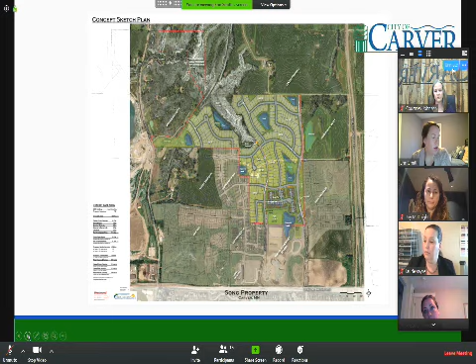So what an EAW is, is the environmental assessment worksheet. It takes a look at a project on all levels, looking at both the natural and built environment after a project is completed. So it looks at things like water resources, air quality, and traffic—things that are built after the project.

At a previous meeting, we discussed the EAW and the council deemed it to be complete. At that point, we were able to route the EAW to a group of experts—I'll go through the list shortly on another slide. But since it was complete, we were able to start the comment period, and we'll go through the comments received from the agencies and what the next steps are.

Something to note: there's no land use review tonight. The EAW was the first step in this process. So right now we're not contemplating annexation, preliminary plat, rezoning, or final plat. We are just discussing the EAW, the findings of fact, conclusion, and record of decision.

Again, just really quick, there was a kind of quick and dirty version of what an EAW was included in the packet, but it's a process run through the Environmental Quality Board. There are many acronyms throughout this entire process. The EQB is an office of the state, and they run the EAW process to make sure we're checking all the boxes, making sure the correct agencies see the information, and they go through the EAW to make sure it's complete. So tonight, the question is whether an environmental impact statement is required.

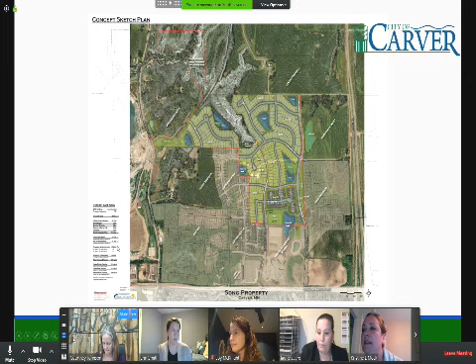Does anyone have a motion? Courtney, I can make a motion to adopt resolution 111-2020, adopting the findings of fact, conclusion, and record of decision for the Timber Creek Environmental Assessment Worksheet. Thank you, we have a motion by Councilmember Mott. I will second that. And a second by Councilmember Henry. Mr. Mayor, can you do a roll call vote, please?

Councilmember Henry, aye—Glenn Henry. Councilmember Mott, aye—Christie Mott. Councilmember Sayer, aye—Lori Sayer. Councilmember McKnight, aye—Joy McKnight. Mayor Johnson, aye—Courtney Johnson. Thank you, motion carries.

Let's see, moving on. It is almost 7 o'clock, but let's go ahead with the Carver County CDA grant agreement, Ms. Smith.

Are you still on my screen share? Sorry. Yep, thank you. Thank you, Mayor and Council. Tonight we are reviewing a CDA grant agreement for the second Carver Crossing building that we've discussed a couple times as a group. So far we've seen a concept level plan for the second CDA building.

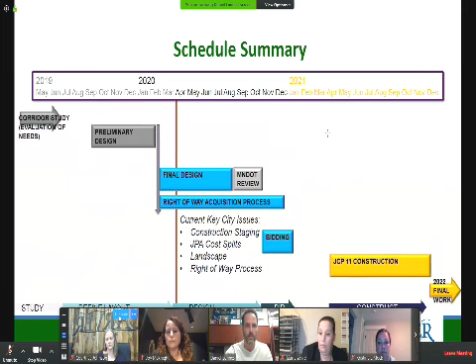And then, of course, the right-of-way process, which is a 9-month process in most cases, beginning with the county leading that. So bidding is expected to happen late fall, November, December. If it gets pushed back a little bit, it'd hopefully be January, February. Construction starting April, May. A single year is the goal at this point.

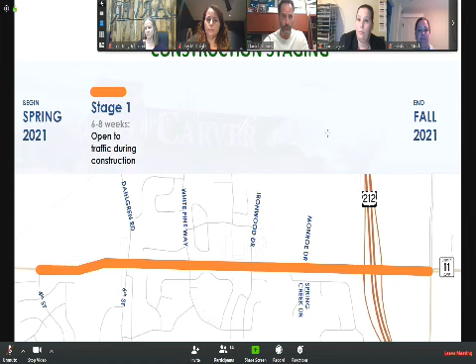So construction staging, you've probably seen most of this, so I'll keep this brief. Stage 1, spring of 2021, would be intended to really start up the project with construction under traffic, work on both sides of the road. The trigger on that would be before school is out. At that point, traffic would be maintained on County Road 11, probably the April, May-ish duration, with barricades and barrels set up on each side of the road, and some work happening in the boulevard.

Stage 2 is the big moment you've been hearing about. That's the closure of County Road 11. What's important to note is that's going to be contractually tied to school closing, or school being out. It's estimated to be about 8 to 10 weeks, but obviously weather can influence that. So after school is out, it would be closed through traffic until the work between Ironwood and Dahlgren is completed. They will have contract requirements that incentivize completion dates and such.

But the movements at this point, you'll notice traffic is still open at Monroe. To some of the early questions about construction access, Monroe would still be an active intersection. The hard closure is actually at Ironwood. So from Monroe to Ironwood, you'd see construction under traffic.

You'll see a lot of activity between Monroe and Ironwood, but it wouldn't technically be closed for this duration. There would be some short-term closures for putting in the pedestrian underpass between Monroe and Ironwood. However, that would have to be coordinated, and that is to be defined further in the staging plans.

During this stage, you have all movements going across County Road 11 and under Ironwood, and all movements going across Dahlgren. But the through traffic has been diverted.

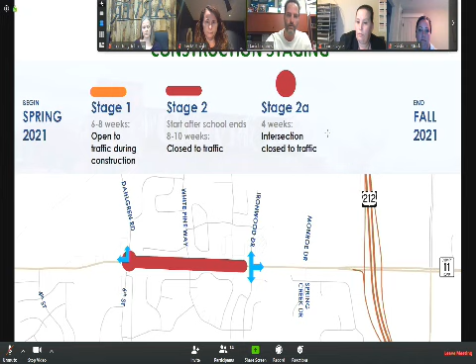So we're having the county take a look at the traffic modeling. What would that look like, sending a couple thousand vehicles downtown? How do the stop control intersections handle that? What's it going to look like? We're trying to get a better feel for what to expect for traffic operating through this portion of the city. You have a certain percentage detour.

We're also taking a look at truck rerouting from Mueller's Pit. Again, that's something that's to be coordinated in staging plans. Some discussions with haulers is going to be ongoing to try and navigate this.

Where you can see things trending is there's a lot of details to be worked out, but that is happening. The staging plans are being developed with this general concept in mind, with a lot of things to be ironed out. Access is being maintained for residents, businesses, Carver Elementary, and the Fire Station at all times. That's a construction contract requirement, stated in different ways, but it's going to be a construction requirement.

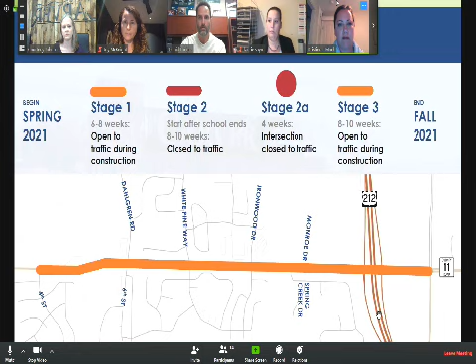Okay, Brent, I could perhaps defer to you a little bit on that. This at this point is some early concepts. The staging plan is yet to be defined and finalized, so comments like that will be taken forward. But Brent, could you chime in a little bit on that early thinking on that?

So two pieces there. We haven't determined specifically where on those side streets or local streets we put them. We've had to advocate for all the streets there are listed as city streets, and so the county is controlling 40. So in a lot of ways we would have to agree with the county, or they'd have to take on that same position since it's their quote unquote road. So they'd have to agree with that strategy to slow traffic down.

We'd advocate for that, but we can if that's something the council wants us to do. But we know for sure that we have the ability to dictate how traffic is managed on local city streets. So that'd be a great comment for staff to have. We wanted to see speed bumps on Main/County Road 40, and then if the council agrees, at some point we can bring a plan back to the council on where we propose to place the speed bumps, and then you can sign off on that location or give us some suggestions on alternate locations.

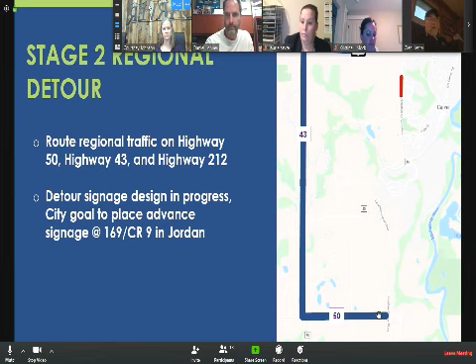Okay, and then as far as speed bumps on 6th Street, if those were accidentally left permanently, I would not object to that. Anyway, that was my only concern, about funneling as much of the truck traffic around Carver rather than putting it right through downtown. All right.

Hey Dan, I just had one thing I wanted to clarify. Can you go back to the slide with all the different phases of the staging? I have a question about phase or stage 2A. I assume that because of the naming convention, that will take place during the 8 to 10 weeks where that section is completely closed down.

Is that correct? Yeah, basically what they're saying is there would be a 4-week window where they'd close that intersection down, which would happen concurrently with the rest of the closure. Okay, thank you, that was my question.

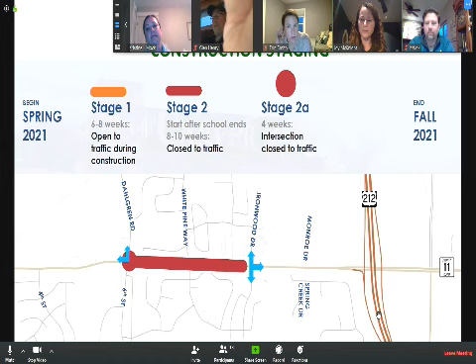Yeah, Joy, go ahead, Joy. Sorry. No problem. So I just want to second Christy Mock's request for the stop sign at Broadway and Main.

Love that idea. I know we're looking at multiple different detours. I think it'll be important to get the signage and communication right. We want to make sure if people are trying to get to 212, they take the detour on 43, and that the local detour is not to get onto 212 at all — it's local access only. I think that's the intention, but we should emphasize that through signage, because technically that's for people to get to the residences, the downtown, the businesses, maybe downtown Chaska. It's not to get on the freeway.

Yeah, there's a number of different techniques that will have to be considered in the staging plan. Ultimately the reality is people are going to take the path they feel is most convenient. Sometimes when you put up signage that says expect extreme delays, people will make a very quick turn. So we'll have to balance that with what we're trying to do operationally to keep the downtown somewhat free flowing and make sure we get the traffic split. Good point, thanks.

Tricky, Dan, honestly, I am fine with whatever we have to say on those signs to keep people.

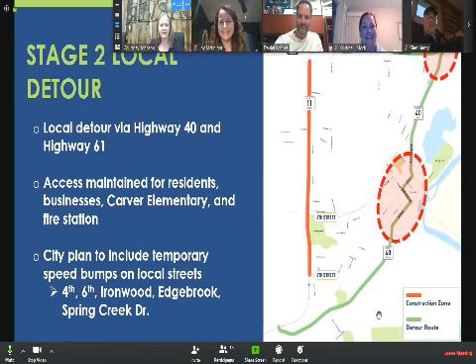All right, ready to move on? Let's do it, wherever you are. Yep, let's go ahead Dan. Okay, so I will turn this over to Aaron to talk about the steering committee for landscape.

Great, thank you Mayor and Council. If you'll remember at our 2019 strategic plan meeting, a directive from the City Council was to develop a steering committee to work on landscaping, wayfinding, and branding for the corridor. So that was part of this project. We had a really fantastic group of people, and there's some nice photos of them to come.

The main goal of this group was to gather input from both residents and business owners. We were pretty specific about the group of people we pulled together, so it was important that we got diverse stakeholders for the project — not 10 people from the same neighborhood, 10 people that shared the same opinion, or 10 people that use the corridor the same way. So we solicited for a resident that lived in town for more than 10 years, a member of the HPC, a member of the Planning Commission, the Parks Commission, a master gardener — we lucked out and actually had 2 — a resident that lived on the corridor, a business owner on the corridor, and a parent with a child at Carver Elementary.

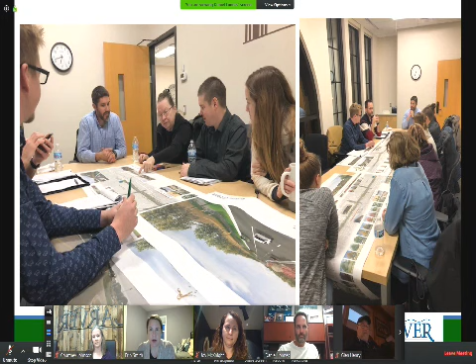So here is the group working. Again, we met a few times and talked through several different options. They gave us a lot of really good feedback. It was fun to see the group work too — largely they didn't know each other, so it was fun to watch them build relationships around the project. It started out as something kind of conceptual to them, but then they were able to make some really concrete decisions on the direction they wanted to see.

Some visions they had from their first meeting: they wanted to develop a corridor that was unique to Carver, so it didn't feel like you were driving down any road in Carver County. They wanted the idea that it was branded and had a unique identity, so you'd know you were in Carver when driving the corridor.

They also found value in incorporating areas we've already spent a lot of time working on collectively, like the sign coming off Highway 212 near Levi Griffin. The signage was important to them, as well as elements already incorporated into the design of Levi Griffin and Monroe Drive. In the design of those two streets, we often pull the Minnesota River up into Carver, with river rock that mimics the way the river travels through the medians on Levi Griffin and Monroe Drive.

Something else that was really important and helpful for them was to balance function, safety, and aesthetics. It couldn't be a project that looked great but wasn't safe for kids getting across to Carver Elementary, and it couldn't be so crowded that it was dangerous to drive down.

A couple of things to keep in mind when making decisions about landscaping: in many cases this is a one-time decision. It's not very often that a city goes back and adds additional landscaping or features to a project.

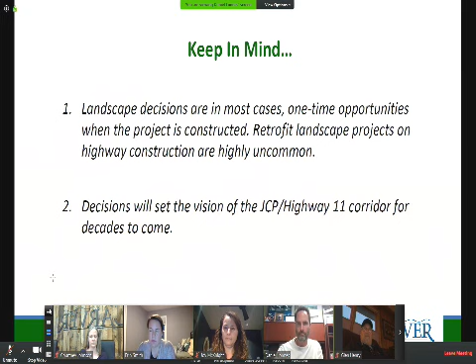Moving through some of the ideas the steering committee had, thinking about what it looks like long term, there was definitely a preference for more natural features. They often spoke about spacing trees in a way that didn't seem like every 6, 10, or 12 feet. They wanted it to seem like the trees existed before the road did, taking out those features where you can see a tree every X amount of feet.

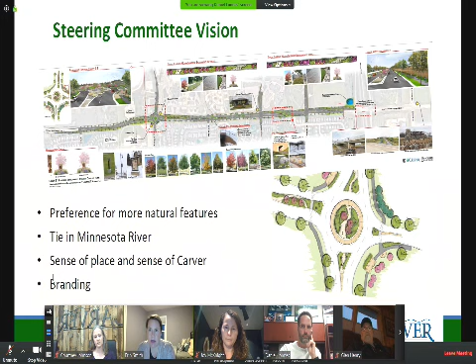They were passionate about tying in the Minnesota River again, mirroring what's on Levi Griffin and Monroe Drive throughout the project to create continuity throughout town. They thought it was important to have a sense of place, and branding was something they felt passionate about—whether the name Carver, the water tower, the tugboat, or the caboose. They wanted to bring those features into the project and pull things from downtown up onto the hill, creating continuity throughout town, pulling from both new areas and the historic downtown.

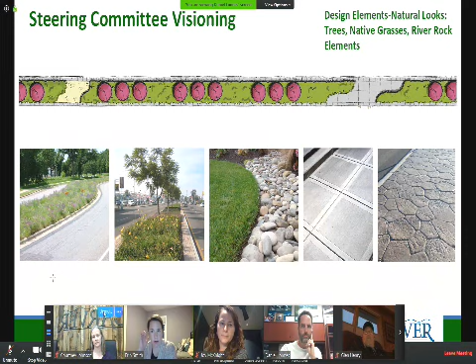Another big conversation was the median. We talked through adding river rock or some type of stone concrete to mirror the river, and then talked through a lot of the plants. At this point we haven't identified species, just a general group of plants we think would work. We're not here tonight to decide between specific trees, that will come later. But the group definitely felt passionate about having a robust tree canopy throughout the corridor, to create a look that in a few years feels mature and dense.

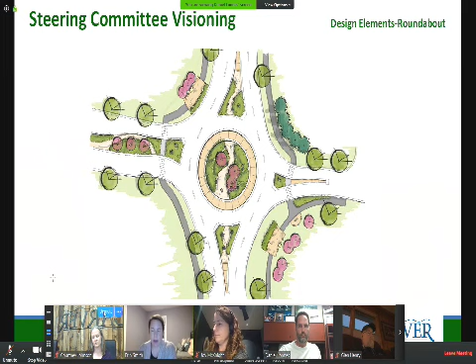Something else they were really excited about was trail lighting. Thinking about the underpasses and the routes to Carver Elementary that will be used, it was important to the group to have trail lighting. There are a couple of options: the decorative trail lighting poles we have throughout town, installed along Levi Griffin, Monroe, Carver Station, and Carver Ridge, along with some trail lit bollards, lower in scale but providing trail safety. Trail lighting was important to this group as opposed to corridor lighting. Dan can speak more to the type of lighting required if we light the corridor, but they felt trail safety lighting was more imperative than full corridor lighting.

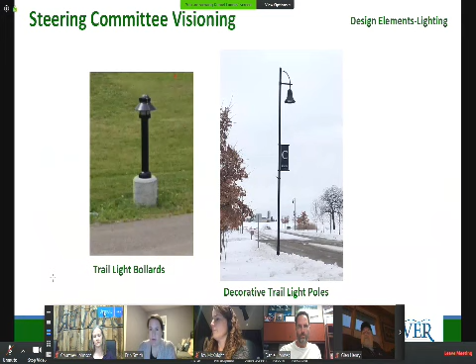One of the design elements they were really excited about were these columns, thinking through branding, the water tower, the tugboat, the caboose, things that scream Carver if you know our downtown. The more columns we'd want throughout the corridor, the more it drastically increases the price, so we need to be strategic about picking thoughtful locations where they'd be seen most directly. We likely don't have the opportunity to flood the entire corridor with these, but they could be important design elements at key points. We also talked through lighting them internally, so you could see them as you drive down the corridor, getting that branding and sense of place, knowing you're in Carver.

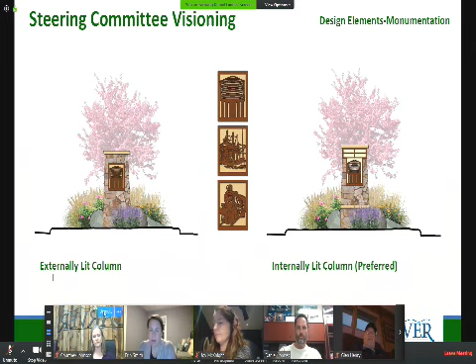Something else a lot of us are passionate about is the bridge over Highway 212, which currently just has a plain railing. As you travel down 212, most communities have some type of branding on their overpass, and we've thought about this a lot. We'd propose adding the Carver water tower and the name Carver to the current railing. As you travel west towards Cologne, we'd retrofit that railing with the water tower and the name Carver. In the future, should there be a trail on the east side of the bridge, we could add a railing with the additional graphic, but for now we'd move forward with the one as you travel west towards Cologne.

We talked a lot about the underpasses. There's obviously one existing now, with one planned in the future to get safely under the corridor. Jonathan Carver Parkway west of it is going to continue to develop, and a large number of our residents will live on that side but will likely want to travel by foot to things moving east, so to get downtown or through our trail system, it's important that we can move them across the corridor safely.

One way we can do that is through underpasses. So it was important to the group to retrofit the existing underpass with an upgraded fence. Right now it's the chain link you see in the photo, but they felt pretty strongly about going to a more decorative fence to add more of a design feature.

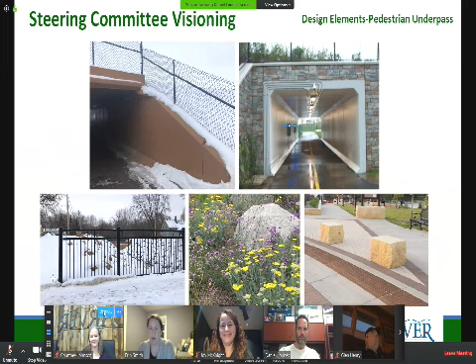I'd ask that you focus more on the underpass to the left, the more traditional round, plain underpass, instead of the one on the right. The right would probably eat up our entire budget with the decorative stone. So it's a pretty picture, but likely not something we'll be able to afford with this project.

Next. That's back to you.

What we decided to start with here is to give you a little perspective about what type of numbers would typically be associated with a project like this. If I just walk through the cost, it's a little hard to gather what's reasonable. This is well over a $10 million project, which we'll run through at the end of the effort, total project for all partners. So the numbers are fairly large.

So what we did is start looking at what's typical for a corridor of this size for landscape budgets and costs. We're going to start with a few examples of other corridors and the percentage of the project cost that was spent on landscape and visual elements.

It gets a little complicated because in cases like County Road 11, you'd have a median that could be concrete, and you delete that concrete and put in grass. The concrete costs X and the grass is cheaper, so there's a bit of give and take associated with decisions like that.

Conversely, lighting for the roundabout down to 6th Street isn't really an optional item. It has to go in, but there could be a slight variation if the lighting was typically a lower cost pole that was upgraded to a more decorative pole. So there's a lot of give and take on this stuff. We do the best we can to average it all out and say what's the net cost as a percentage of the corridor.

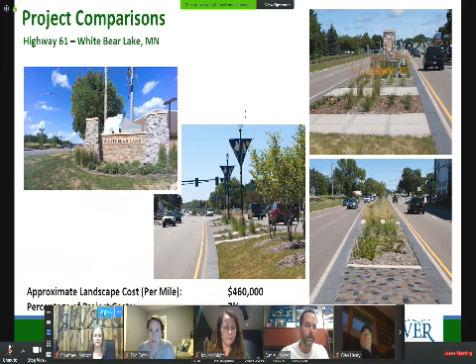How that broke out: the approximate landscape cost on that was about $460,000 per mile. The percentage of the project cost was 7% spent towards visual elements. This is less than a mile, so ultimately the landscape numbers were about $500,000.

You'll see a number of structures in this corridor. It's a shorter stretch of road with a lot of very refined medians, planter beds, decorative concrete. This is what we'd call moderate, upper-level landscape design. This will be one example of what was done in another community.

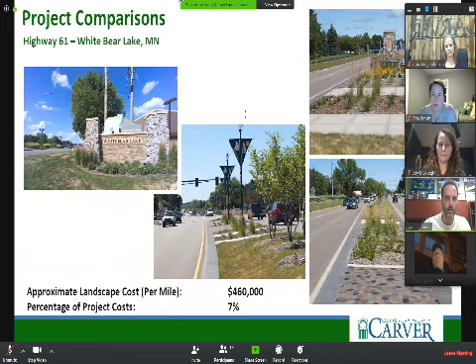Highway 5 in Waconia is another example. This is a little bit lower as a percentage of the project cost. It came out to be a little over $500,000, about $550,000. A lot of that was lighting. A big priority of that corridor ended up being trail lighting and off-system lighting.

The corridor itself was not lit, but the trail system was pretty well lit. Throughout it there's some benches, decorative railings and walls, and some spot planter beds out in the middle. That one came out to be about 5%, give or take, of the construction costs dedicated to some of the visual elements here.

Mississippi Drive in Muscatine, Iowa. This was very highly landscaped. This is where the numbers get a little higher, on the upper end of where landscape was a very high priority in this corridor.

You'll see about 10% of the construction budget was expended on landscape elements, visual elements, or wayfinding, as seen on the top right. So they've got a lot of structural elements, notable signage, pillars, lots of colored concrete, planted out medians, boulders and such.

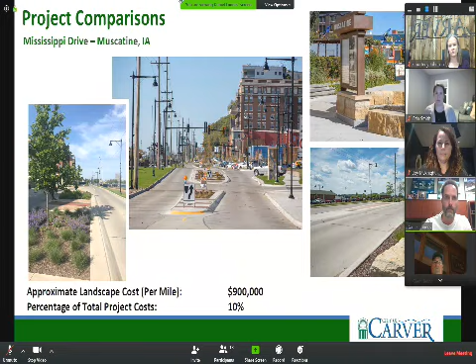So here's how these stack up: Highway 5, 61, Mississippi Drive - the landscaping numbers put into those projects. All of these jobs are going to be millions of dollars. 10% of the 900,000 - that job was perhaps about a $9 million project.

Anyway, all of these jobs are similar as far as the priority of the corridor. As far as we saw, Jonathan Carver Parkway in the city of Carver is really to be determined, and that's really what we're here to talk about: where would you like the project to be geared at this point? A mid-level landscape cost percentage for a corridor such as this, we're saying plus or minus about 5% might be middle of the road for the priority of the corridor.

As we've taken away our understandings from the steering committee, with input gathering from stakeholders, three levels of concept plans were generated. That's what we're going to walk through here today - a low level, mid level, and high level.

The intention of the landscape architects is to say, here's what we heard - here's the low-level idea that would generate some of the feelings of the committee. You wouldn't get all of them, because the committee was not tasked with deciding what should go in and out based on cost. They threw out ideas, so the low level will reflect some ideas, but not all.

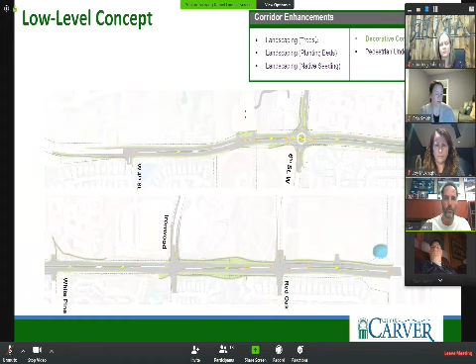And in the low level, you will not see anything for those features here for the monument signage.

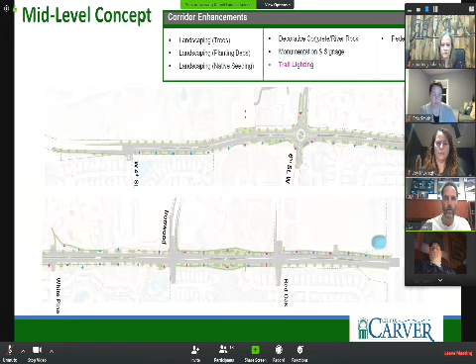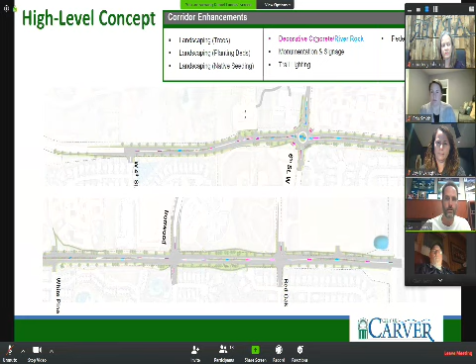So high level concept: trees, lots of planter beds, a lot more planter beds, more native seeding, more decorative concrete, river rock - there's certainly more opportunities to do that. Higher budgets, you'll see a lot more column features. Those structural columns do add some expense, and it's more littered throughout the corridor. Trail lighting, there's more opportunities for lighting, but similar to the mid-level concept. And then the underpass has more elaborate treatments as well.

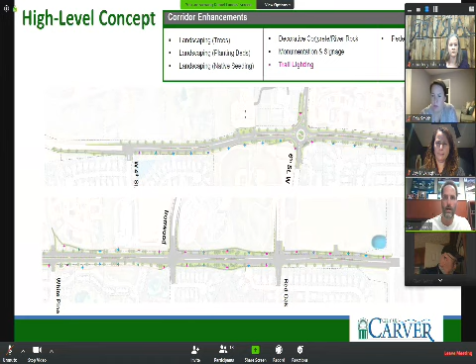So maintenance considerations, a couple of comments from Brian and his team. We looked at medians as a big concern - parking spots for maintenance vehicles in the ends of medians is a big deal. Longer medians add parking in the middle so that they can park and maintain it for both ends and in the middle. We recommend a concrete maintenance strip to try and keep the maintenance equipment away from the traffic. Again, there's no shoulders on this corridor, so that is strongly recommended to have at least a 12-inch separation from the higher speed traffic to the mowers and whoever's out there doing maintenance work.

And then general maintenance comments: consider safety for median access maintenance needs, which of course is the utmost concern for the final design elements. Plant items that need little or no maintenance. Use plant items that are salt tolerant - that's always a challenge. There's certainly plants that do better than others, but short of plastic plants, we're always struggling if it's really heavily salted. We do struggle, so a lot of it gets into placement, and there are certainly more species that are more tolerant than others. So to this point, little or no maintenance and salt tolerant as possible for plantings.

And then keep irrigation controllers and valves out of medians and to a minimum. At this point, irrigation is not planned for in the corridor, but if it were for any of the refined beds, the goal would be to make sure that it can be controlled without getting into the center.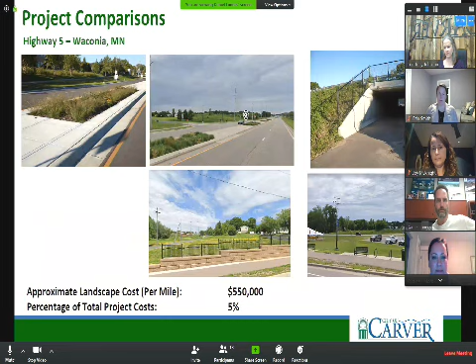And then I have a question for you. So the colors for inside the underpass—you showed us that really gorgeous one that we can't afford, but if you look at the one that's proposed, it's... let's see, I gotta go back a ways. All right, there you go. Oh yep, so it's a really dark, dingy brown. Is there a reason we haven't painted it a lighter or concrete color, whatever it might be, instead of so dark?

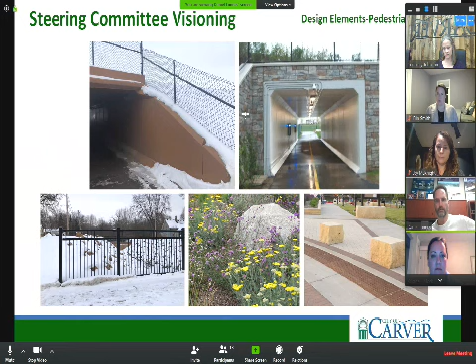Having something a little lighter might give more light reflection in there for sight lines. That's a good comment, and I guess it's a paint job—there's nothing that says we couldn't apply budget towards repainting. So if that's a priority, something you'd like to see, that's a comment we'd write down. For the new one, even? For the new one certainly. That's just a matter of specking it out as to what would be done with it. The old one would be a repaint if we decided to change the color and it was worth it to stay consistent. Thank you, yep.

Dan, the question I had is when you showed every single low, middle, high concept for the roundabouts, it doesn't look like any of the upgraded or new lighting is demonstrated in those concepts. Is that true, and are we just looking at more of the landscaping without that lighting element? Yeah, you got another good one for final design—you're on the ball tonight, because that's another design element you're picking at the details on.

Okay, can I ask you about that one? The reason we didn't put that in there is because, while it's necessary, we still have to pick a pole, and the roundabout lighting has to be laid out and designed for certain lighting levels. So I didn't know where the poles were going to end up at this point, but there will have to be lighting there just to light it for safety, and then we'll pick a pole and see what would be most appropriate for the corridor. So yes, it needs to happen, it's just they're not placed yet. Okay, and there's likely going to be at least 4 times the number of light poles there versus the one that exists, correct?

Yes, it's going to light probably 300 feet up and down in each direction on the corridor—300 feet north and south of overhead lighting. Both road crossings will be heavily lit, and it's really just a matter of pole placement and pole selection at this point. But with lighting like this, we could say, hey, what if you need upcast lighting in the center of the roundabout. That's one of the design elements that could be worked into it, but it will be lit overhead.

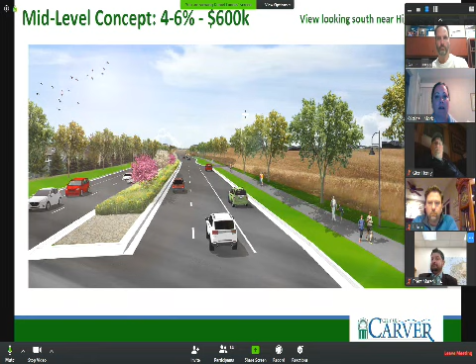Dan, could you go back to the roundabout question one more time? Forgot one of my questions. Right, the one with the lit columns. There we go. So I'm assuming those columns are going to be spendy. So if we went with some type of column identifiers, instead of having multiple ones hidden off to the side in the trees, would that cut down the cost? Is there a reason that by the two rocks there in the median we couldn't put one there and cut out at least one of them?

There might be more around the edges, I can't tell for sure. Is there a reason they're off to the side rather than in the median? There are some requirements that say if the median's too narrow, you can't put it there because it becomes a safety hazard, an obstacle. So in this area, the median might get narrow enough that we can't put it there.

Well, it actually gets pretty wide as you head towards the roundabout. It does, and I'm not saying it's not possible. It might be. It would just end up being a design discussion with the county staff as to whether or not they're comfortable with it. Yeah, I know you can do it in the middle of a roundabout because the center third is generally considered safe.

So what you're saying is you'd like to see something like that right in the splitter island, is that what I'm hearing? Well, I guess I'd rather hear from the rest of the council on their feelings. I don't know what the cost per column is, but I can imagine it's spendy, so I don't know how everyone else looks at the importance of it or not. I was just considering if we were going to do one or some, could we bring the number down cost-wise—is it worth looking at?

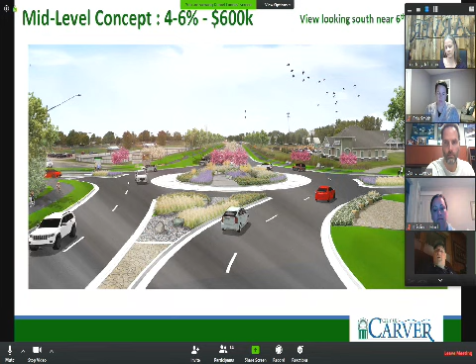As far as the tunnels, we should be able to do those, because once you start talking about staining or coloring the concrete, now it's a whole different level of money as well. I'm not sure, I mean, we're gonna get into budgets and money next, so I guess I'll just defer until we hear more about the cost of those monument signs and stuff. I understand the branding, but they can be very expensive as well.

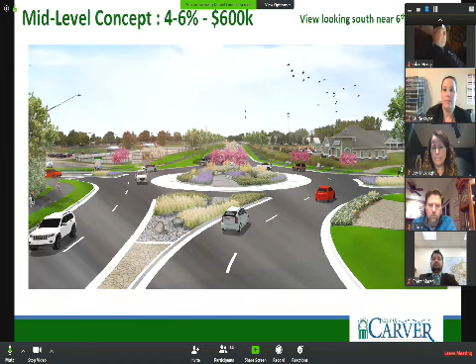Okay, all right, I made some notes. Just so you know, the comments will get written down. There'll be reviews with the county on what's feasible, and I'll try and blend a design with your comments to the county's comments for safety and other concerns they might have, and ultimately guide it towards a finished product that you'd have an opportunity to confirm prior to final design. But that being said, what we need is what's the general direction. We're a little bit high, so we're going to talk a little bit about costs at this point.

So the following costs are after the city's anticipated share of the county median credit. The median's not going to be concrete, so they would give money to the city for whatever they are going to do. So the high level is 1.2 million — that includes a fair amount of contingency and such, but again, we're trying to be straight up with planning level numbers on this. Mid-level landscaping would shake out to be about $600,000, and the low level is about $100,000 after the county's credit. So a little bit about the other elements that you're budgeting for in the corridor.

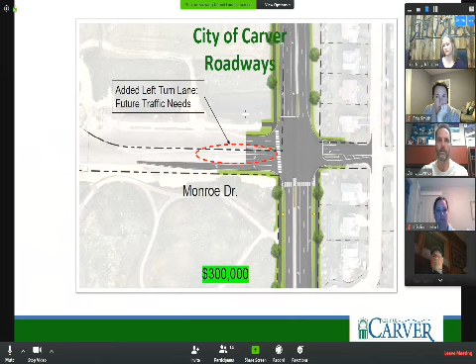So that's why it's included at this point. The city also has the cost of the other side of the road, anything that's done on the local street outside the county right of way. So you get to Ironwood, second westbound lane going into the school is being added, and the second left turn lane exiting the school is being added. That's approximately $500,000.

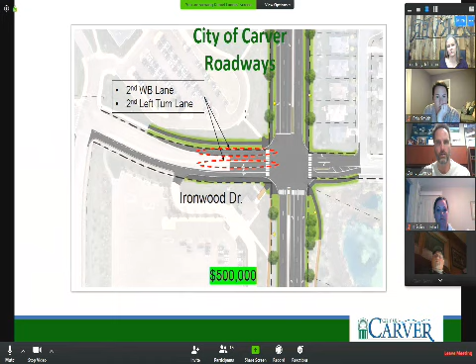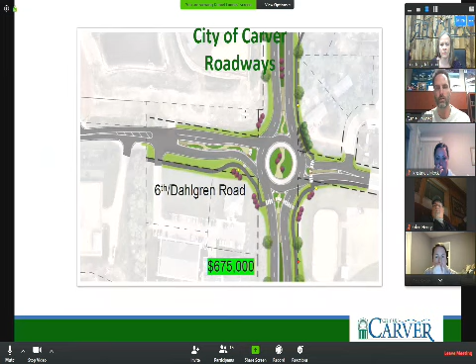So other things that are in the project: City of Carver utilities, sanitary sewer, 2 casing pipes across 11. This is an opportunity-based element. Eventually, we're programming that you would need a sanitary sewer lift station on the west side of County Road 11, going to the east. If you'll recall from past discussions, we did eliminate the need by going off the size of that 21-inch going all the way down the corridor. That did remove a lot of costs, but going to a lift station in the future is the current thinking.

That would require us crossing 11. So ultimately what would be done is you put in 2 casing pipes across 11 because the road is ripped up at this point — a lot cheaper to do it now than it would be to jack a casing pipe across an active highway in the future. And then ultimately putting in the force mains that would be in the County Road 11 right of way would be another element. And again, these are opportunity-based elements that would be likely quite a bit more expensive to do later.

Water main, same thing - pressure reducing station, which is a separate CIP project necessary to replace a failed pressure reducing station. That line of pipe is inactive at this point. That's being coordinated with the County Road 11 project, so that's a separate CIP item that would be coordinated with this plan because it's in the corridor. There's also a 14-inch raw water main crossing Route 11.

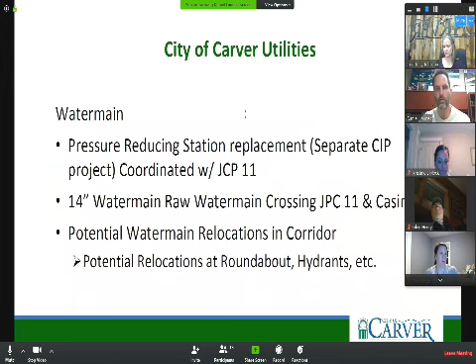You're all familiar with the water treatment facility and raw wells. So that would simply be putting the casings in and part of the pipe with the project - basically an opportunity to get it done without drilling. And then some water main relocations that might be necessary with the roundabout, since it might be required to relocate some water main in a poor location for the final intersection, plus some hydrant relocations. So those are the utilities being at least budgeted for right now.

So here's a summary of the overall project cost. I mentioned this is still planning level, so I'd emphasize this is a 30% estimate as far as I'm concerned. $17.5 million is the project cost approximation at this point. That includes $2.5 million of construction contingency, about $2 million of project soft costs, right-of-way estimated at about $500,000 - a very early estimate - and then construction about $12.5 million.

The way that would break down by participant between Carver County and the city of Carver: Carver County would be about $11.5 million of that. The city of Carver would be in the neighborhood of $6 million.

The way that breaks down, if you get into the city of Carver's share of $6 million, that breaks into a number of different categories. You'll see about $3 million of that is general bonding authority, streets and related improvements - that's where the landscape bucket is sitting at this point. The park dedication fund had programmed about $500,000 for the ped underpass and trail improvements, broken out separately. Sanitary sewer fund would be about $500,000 for current estimates. Water fund would fund about $400,000 of that $6 million, and the county median credit is included, estimated about $400,000 - about 7% towards the share.

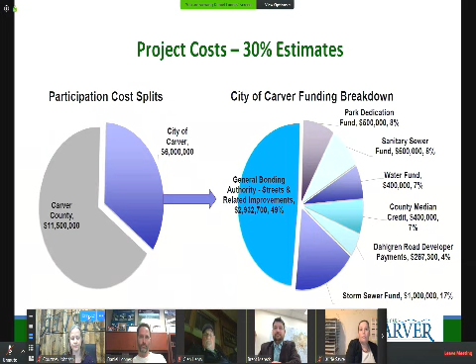Okay, thank you. Dan, can you move forward, please? All right, so to close up this presentation, we're ultimately just looking for a few pieces of feedback here. I know this was a lot of information, a lot to take in.

This really wouldn't be the last opportunity to say something about some of these elements, because this is the beginning of the final design process. But ultimately, what we're looking for is council feedback on the corridor landscape direction, and what would be necessary to move towards a more refined design incorporating all the elements you've talked about and commented on tonight.

What about the roundabout lighting? What about the placement of these columns, things to that nature? That would all be guided by this decision, low, middle, high, for the landscape direction. We'd have plant selections and all kinds of stuff. So that's one element we'd be looking for feedback on, low, mid, high.

And then verify local street improvement scope designs, make sure there's nothing in those current designs you'd want us to veto at this point. Say no, don't carry that any further, it's not worth the money to add those lanes at this time, we'll do it later. That type of feedback would be appreciated.

And again, it's not too late, but it will be soon. At a certain point, there's going to be a lot of redo to make changes later, and it's at that point we'd say it's getting into the redo stage if we start deleting a lot. So just verify those designs are what we want to move forward with, and provide feedback on project costs, anything that would inform next steps.

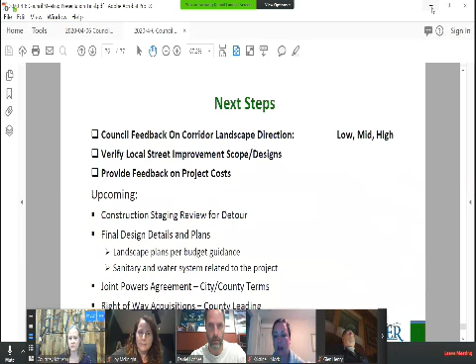Thank you. All right. Moving on, 10.2, 2018 Stormwater Project Update. Mr. Lennis. Okay. Switch over. All right.

Okay, I will keep this as brief as possible here. This is a quick update on the 2018 storm sewer project, just to tell you where things are at and what to expect in the future. Not surprisingly, you probably know where it's at. The river's up and nothing's happening. But we will tell you what might happen in the future if the river goes down.

So just as a brief history and status, project summary and next steps here, we'll cover why are we doing it. There's been a lot of talk about this, so just chime in if there's any questions if I go too quick. But it's basically combining 2 stormwater lift stations into one, improve reliability, operations, the reduced maintenance requirements and such.

It was in 2018 that this was going out here. It couldn't be done in 2019 because of river levels. And that's really where we stand today, is the river's been up and we just haven't had an opportunity. So the only time that the river was low enough was during, unfortunately, steamboat days. So we're back this spring and waiting for the river to go down.

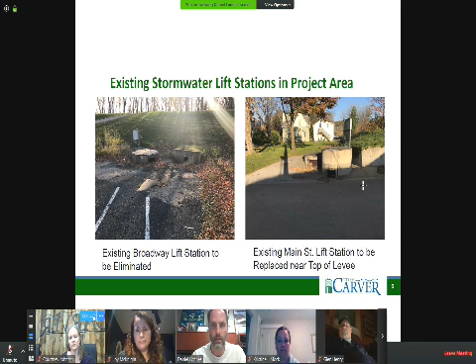So the project area is existing lift station at Broadway would be removed, and then the existing Main Street lift station would be replaced as well. So what do the stormwater lift stations do? When the river gets high enough, the sluice gates get shut, and then the stormwater goes into those stormwater lift stations, and it gets pumped up over the levee in the river above the flood level. So they're pretty essential, very critical, and so the need to make sure you have some confidence in the operations, and that they're robust systems is quite high because obviously the flooding occurs if they're not working.

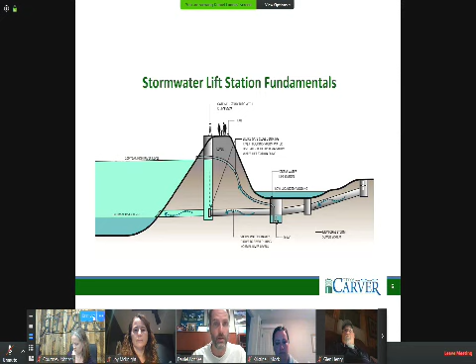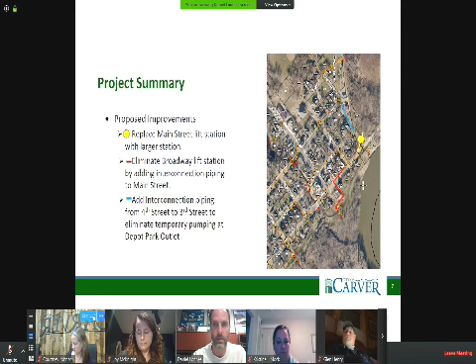So it's a dual pump station that's being constructed. So here's the fundamentals of what's being built. Proposed project is to replace the Main Street lift station with the larger station, eliminate the Broadway station, and add some pipe to get the water that goes from the Broadway station to the new one. And then that blue section is to add a connection that would get rid of that manual pumping that happens up at Depot. So that's the work that needs to happen, and it just needs to happen when the river's low enough.

So at this point, it's just continuing to monitor the river levels. I believe it has to get down below 20 in order to get some of the work completed, and then down even further to get all of it completed.

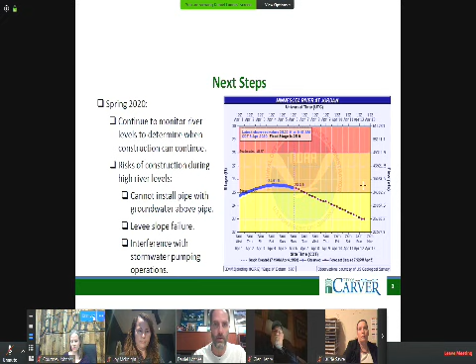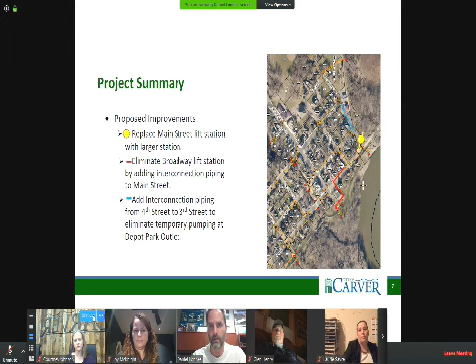So when it does happen, I think we've talked about what to expect. There'd be some pipe work in the downtown area and some pipe work in that 4th Street to 3rd Street connection area. All that would be open cut storm sewers. If there's any questions, we'll probably have more information and communications as we're about ready to construct. But as of now, it's still on hold pending the river dropping.

So any other questions? Aaron Schmidt's on the line here. We've just been tracking this, and Brian Skoke, I believe, as well. They've been on top of this the whole time.

Go ahead, Lori. I have a question - other than the level of the river, can this be done in the winter, or is this a seasonal project? It can be done in the winter. In fact, we were just talking about that this spring, or late winter, as to whether or not we'd cut it loose to happen in the wintertime.

The challenge with doing it in the winter is you don't have access to bituminous repave patches. So that was one of the compromises - you do it in the wintertime, you're not paving any of your patches back in until spring. But it was getting to the point where if the river's never low enough, it's almost too risky for people to do it on. By the time they were able to go, the river had come up and the opportunity was lost. So if we can't find a window this summer, I think we'll have that discussion again.

And about how big a window, what time frame do you need? Does this take a week? Does this take 3 months? Sorry, I have no idea. This is probably - the station itself may take a little bit longer to finish up all the controls and everything, but the pipe work itself is probably weeks, 2 to 3 weeks.